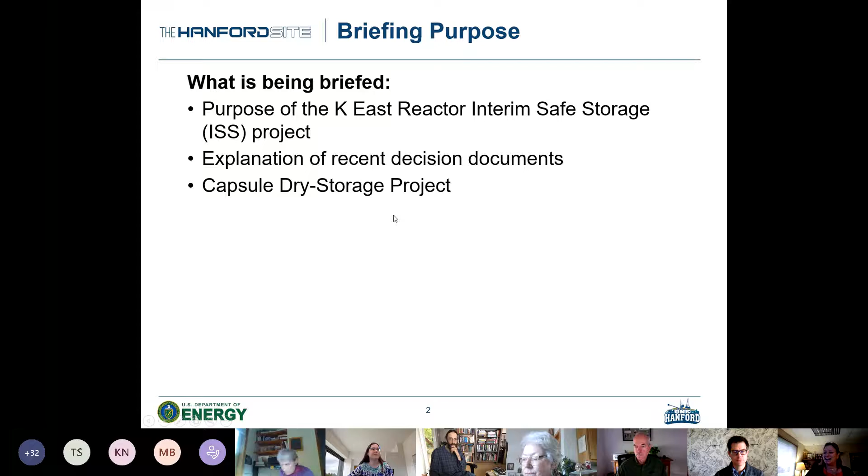All right, as Jolynn mentioned, my name is Kelly Ebert, and today I will be giving you an update on the K-East interim safe storage.

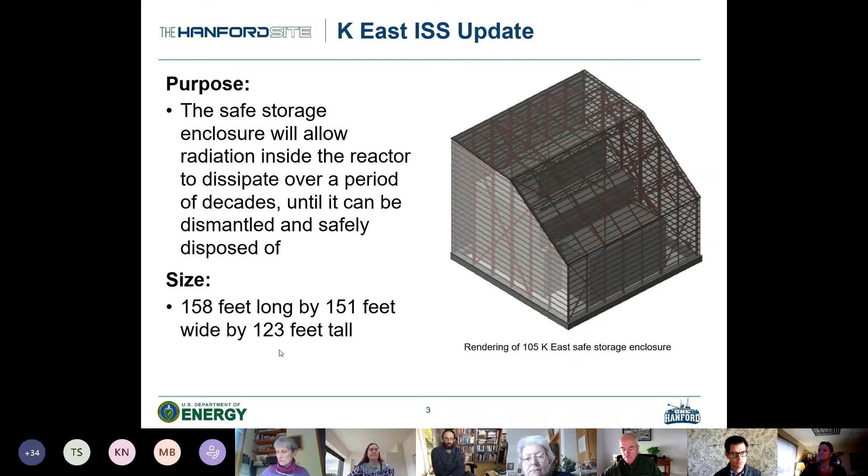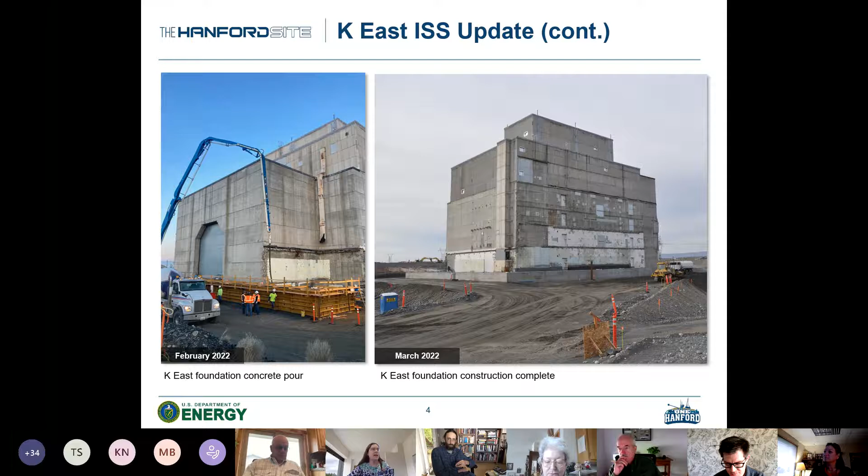Okay, so this video I want to show you was done by the contractor, and it outlines the concrete pour that was done. If you want to go ahead and click on that, and let's hope for no technical issues.

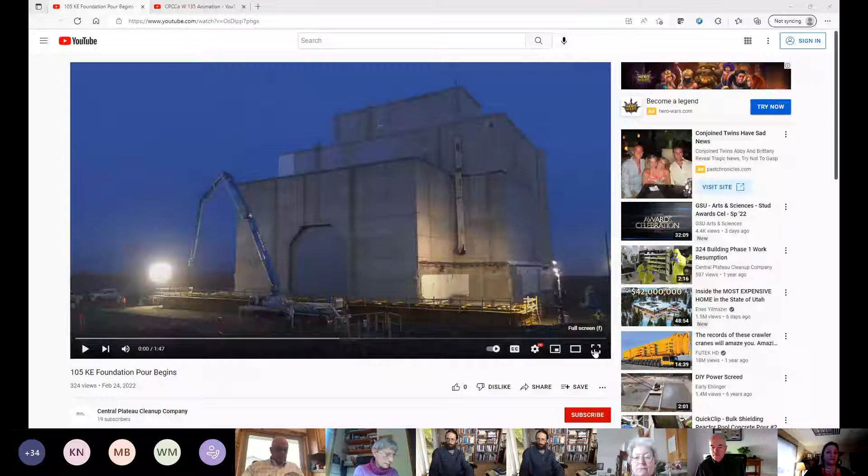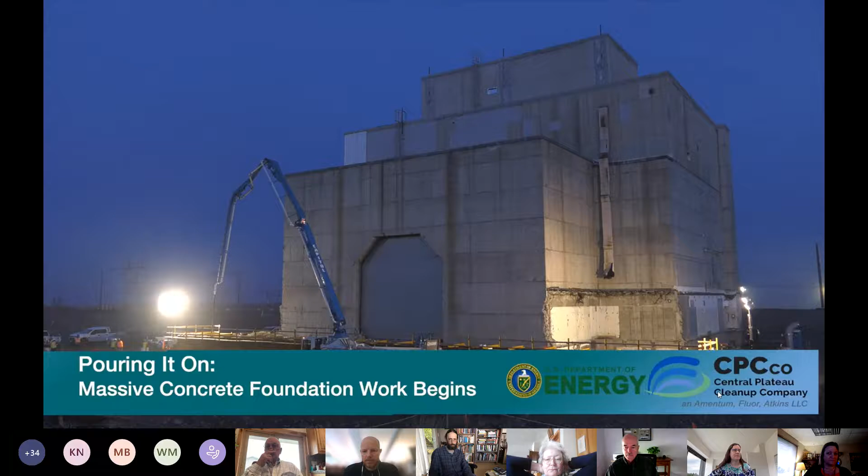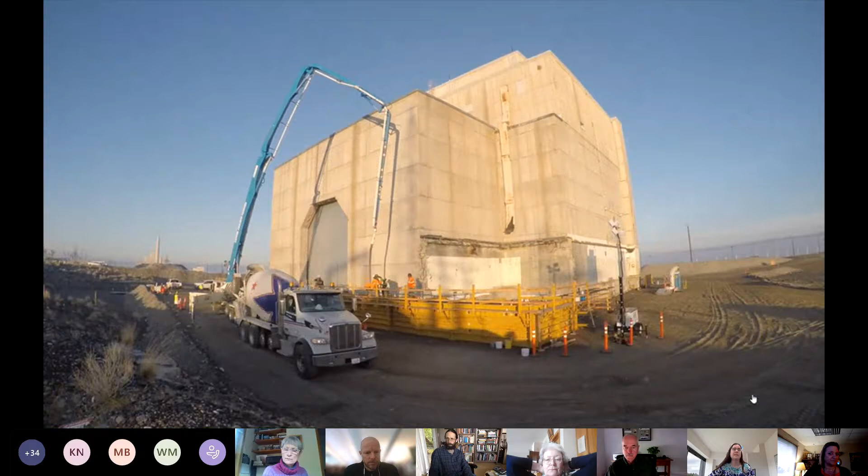Can everybody see the screen? Yes, we can. Wonderful. Oh, you know what I didn't do? It doesn't look like we have volume. I think there's commentary with the video. All right, let me try this one again. My apologies, everyone. Mark Reese did send these videos out to the board earlier, so most of us have had a chance to look at them.

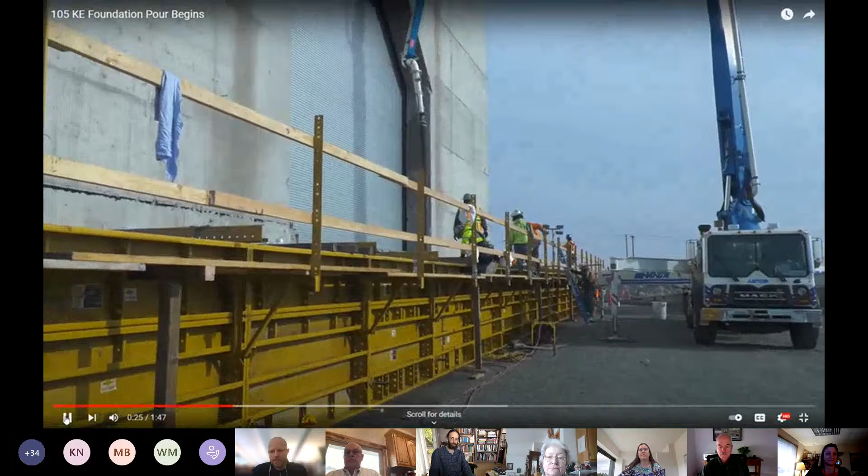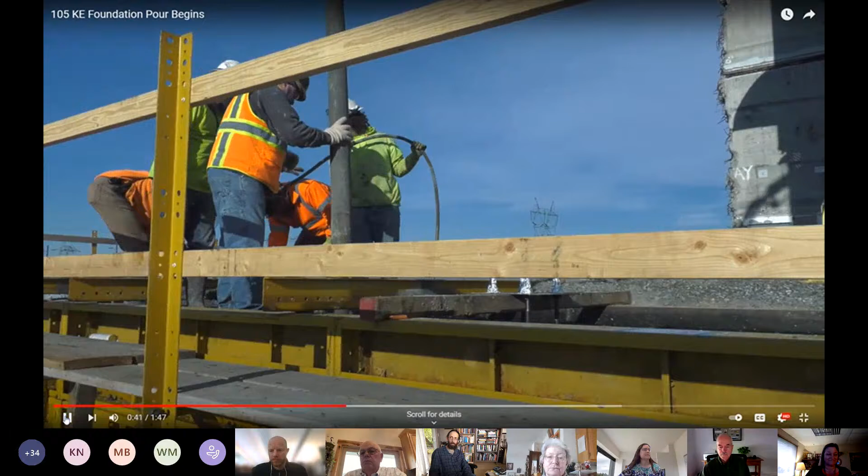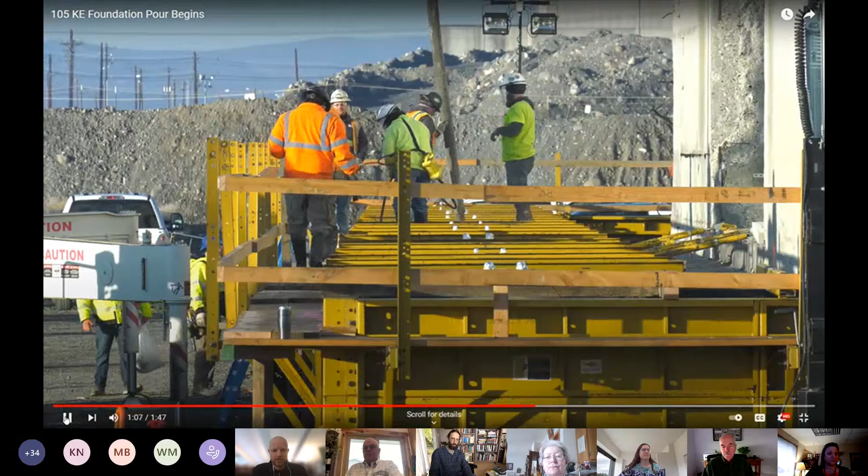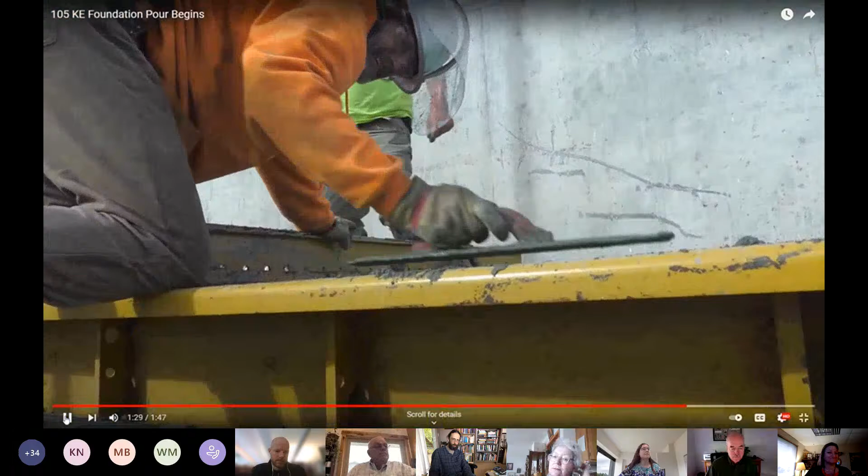The first piece of a very big puzzle is now in place. At sunrise, crews began pouring 24 loads of concrete, 240 yards total, to form the first section of the foundation surrounding the 105K East reactor. This huge chunk of concrete anchors the massive steel enclosure, sometimes called a cocoon, that workers will assemble to protect the building while the radioactivity in the reactor core decays over the next several decades. A lot of hard work, but the crew says it's worth it. This is one of the biggest construction jobs I've ever been on, and it's fun. I'm enjoying myself. It's just great. This is the first of 4 sections of the 6-foot tall, 6-foot thick foundation that will be poured. That's a big pour for the manpower and a grade beam. So there's a lot of planning to this - many days of looking at prints, going over prints. It takes the whole team to do this: the rebar crew, the engineers. Once our foundation is complete, we'll finish backfilling and start erecting the steel structure, probably mid-April timeframe, and it's going to be like a giant erector set. The K-East reactor operated from 1955 to 1971. It will be the 7th of Hanford's 9 former reactors to be placed in interim safe storage.

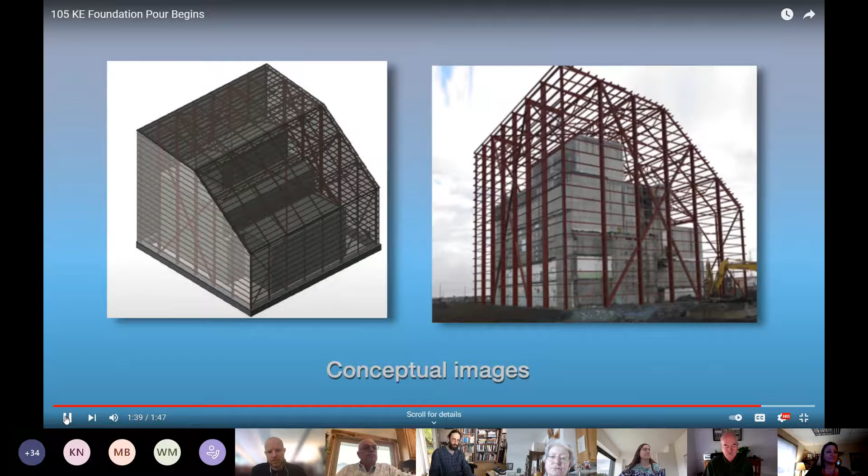All right, thank you, Jillian. So should we ask if there are any questions or comments on this video, or hold off to the end? You're welcome to ask. I know JoLynn is just bringing the presentation back up. I just had 1 or 2 more slides.

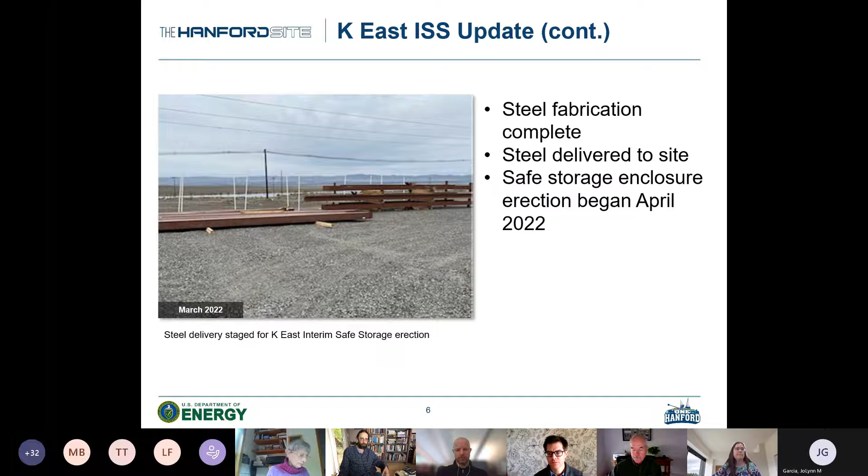All right, thank you. Good morning, everyone. My name is Naomi Jaschke. I work in the Soil and Groundwater Division here at Hanford.

So I hope you don't mind, it's been about 10 years since I presented to your board before, so I thought I would just introduce myself a little bit before I began. I'm originally from Ohio - go Buckeyes, Buckeyes fans out there. I moved here in 2007 to work for Department of Energy.

There are 5 pump and treat facilities along the river, and this larger pump and treat is in the center of the site, the Central Plateau. This facility treats 2,500 gallons per minute, and the combined treatment along the river in those 5 pump and treats is 2,400 gallons per minute.

So together, these facilities are treating over 2 billion gallons of groundwater every year. We've removed 500 tons of contaminants and treated more than 2.4 billion gallons of contaminated groundwater combined at the 6 pump and treat facilities last year in 2021. This year marked the 7th year in a row that we have treated over 2.2 billion gallons of water, and we have the goal of treating 2.2 billion gallons again this year. So we're making really great progress.

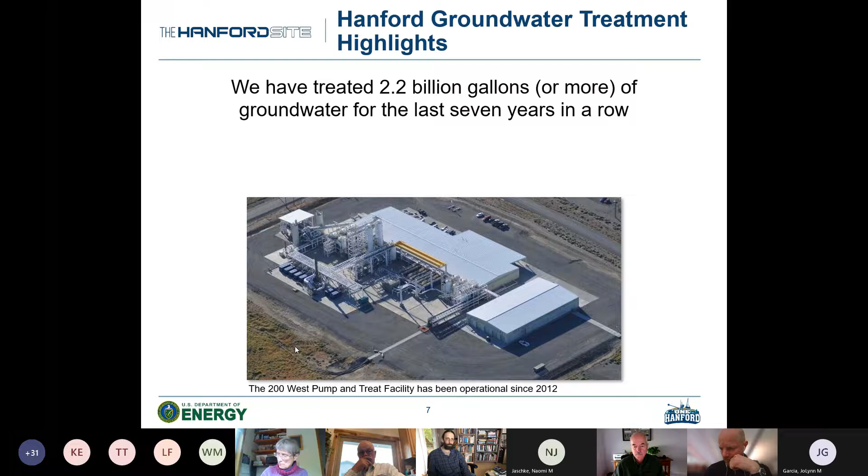And finally, in the center of the site, in the Central Plateau, this is the record of decision, which encompasses 2 operable units. We have 200 BP5, which is the green area to the north on the east area, and 200 PO1, which is the tan color to the south.

A little bit of background: decision documents are part of the CERCLA process. CERCLA remedial actions are documented in formal records of decisions, or what we call RODs.

A little bit of history on this. In 1989, the U.S. Environmental Protection Agency, EPA, placed 4 areas, the 100 area, the 200 area, the 300 area, and the 1100 area of the Hanford site on the national priorities list. In anticipation of that listing, EPA, DOE, and Ecology entered into the tri-party agreement. This agreement established procedural framework and schedules for developing, implementing, and monitoring CERCLA responses on the Hanford site.

If you're interested in more information, I can dive into that in a separate presentation, but I just wanted to go over quickly before I dive into the decision documents the basis of how we get to decision documents. So as I go through the decisions, I'll be talking about remedial design, remedial action, work plans.

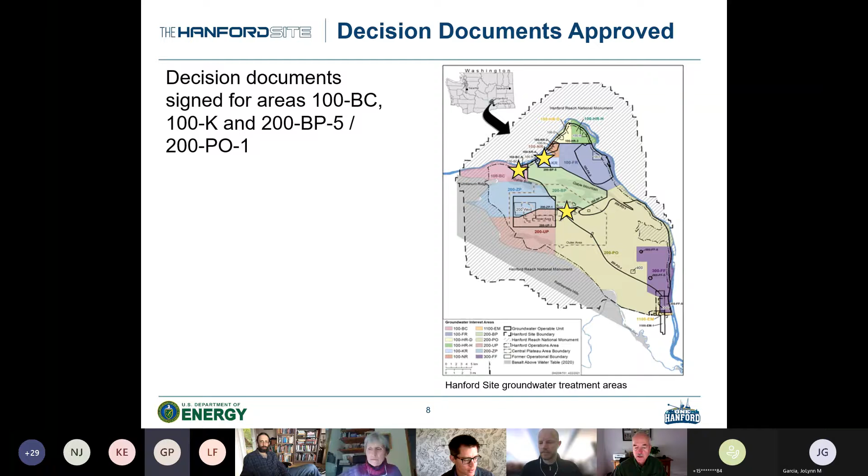Hello, this is Gary Pyles. Can you hear me? Yes, we can. Go ahead. I guess I'm next, so if you want to go to the next slide.

I'm going to start off with a 5-minute video that walks through a brief history of the capsules as we begin this project to remove them from the pool cell and put them into long-term dry storage. More importantly, it'll show the process for how we're going to do it, walking through the different areas within WESF we're going to use, and describing the transfer equipment and the vertical concrete casks where the capsules will be stored. I'm a visual person, so I like to start off with that, and it'll give you a better idea of the process before I talk about status.

Okay, go ahead and start whenever you're ready. Okay, thanks so much.

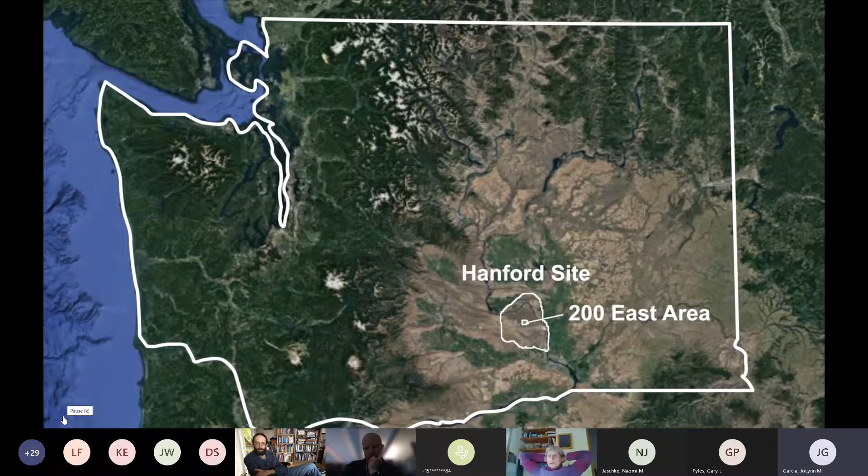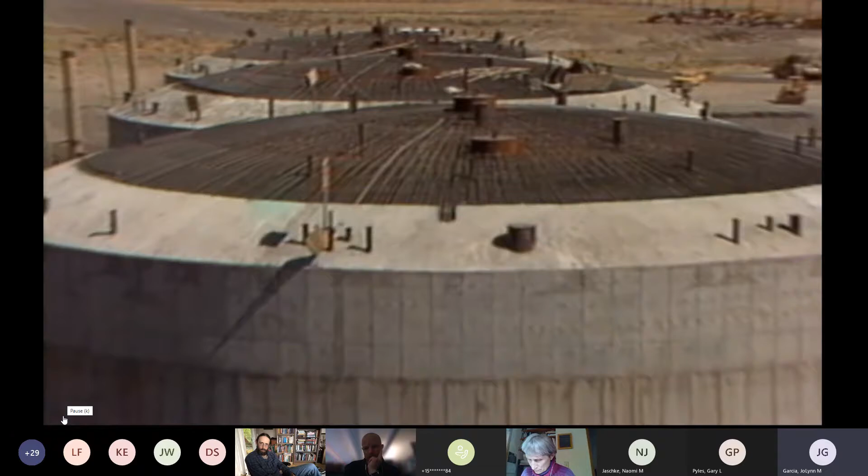The U.S. Department of Energy and contractor Central Plateau Cleanup Company are reducing risk in the 200 East area of the Hanford site in Washington state. Engineers have developed a safe and compliant process to remove 1,936 highly radioactive cesium and strontium capsules from underwater storage inside the Waste Encapsulation and Storage Facility, or WESF, to a safer dry storage configuration. In the 1970s, cesium and strontium were removed from waste tanks at Hanford to reduce the temperature of the waste inside the tanks. The capsules represent about a third of the total radioactivity on the Hanford site.

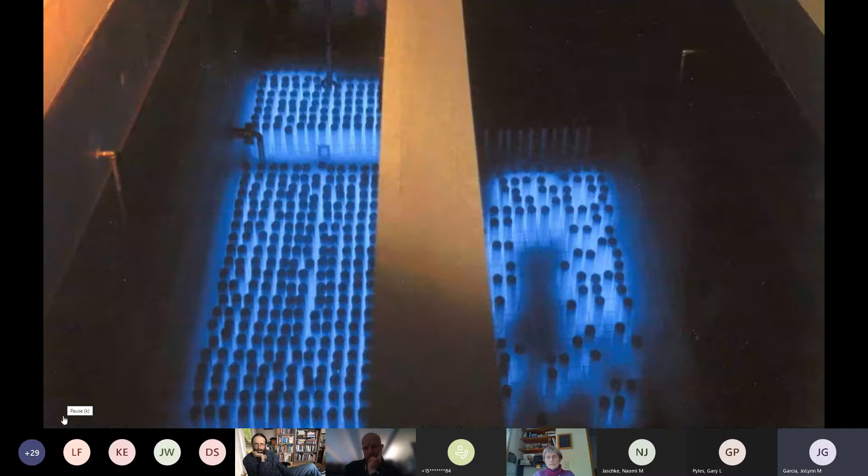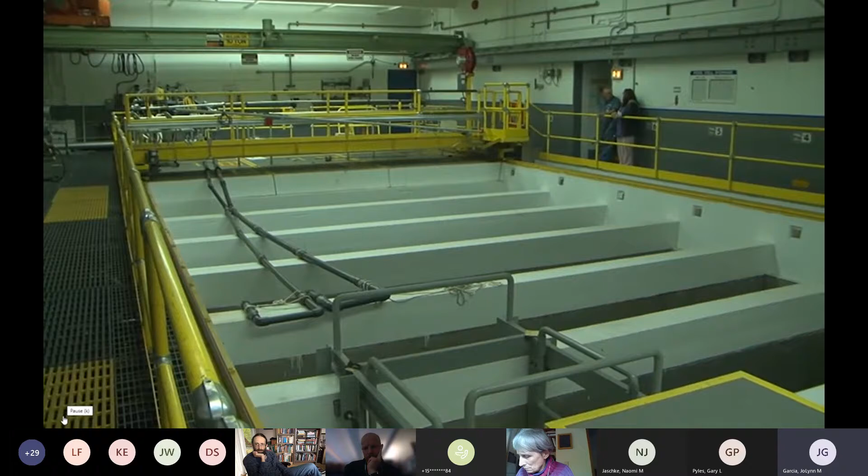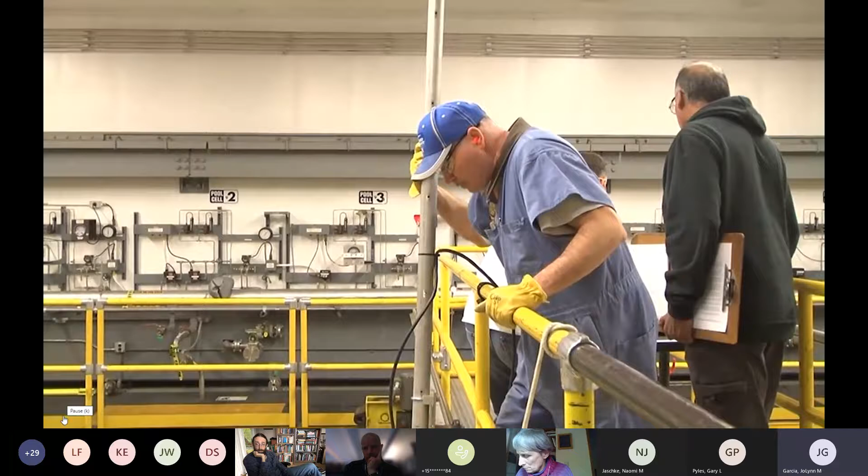While they are currently in a safe configuration, WESF is an aging facility. Transferring them to dry storage would eliminate the possibility of a release of radioactive material in the unlikely event of a major earthquake that might result in loss of pool storage water and subsequent overheating and breach of the capsules. Teams of well-trained personnel will accomplish this work safely and compliantly, benefiting from lessons learned and proficiencies gained from training with the equipment at a full-scale, non-radiological mock-up.

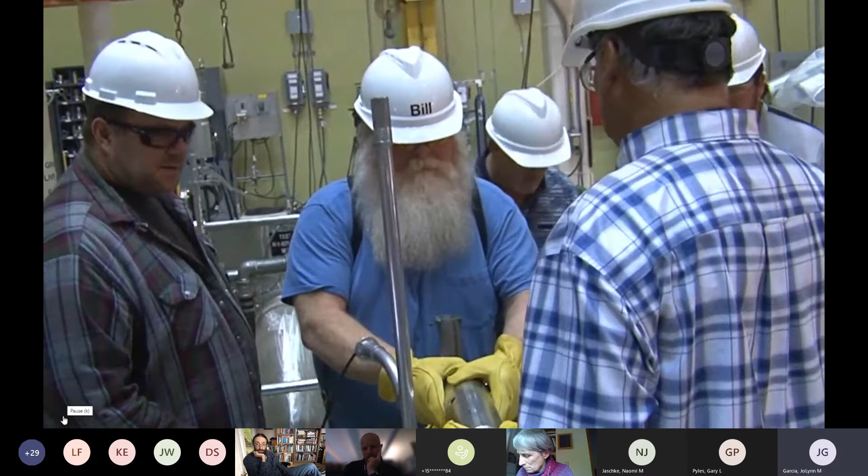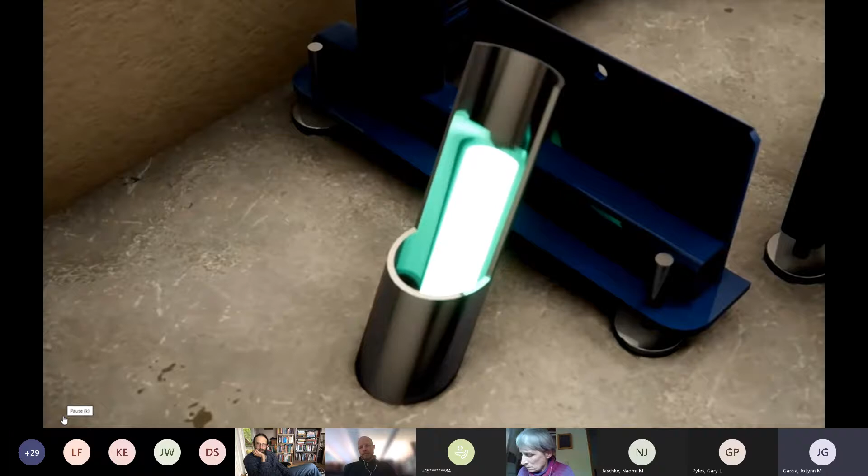To begin the removal process, workers on a catwalk will use long-reach pole tools to access the capsules, which are stored under 13 feet of water that provides adequate radiation shielding. Workers will retrieve the capsule and move it to the transfer chute connecting to the hot cell, or G cell. From outside G cell, workers will use manipulator arms to bring the capsule near a shielded window to inspect it for damage, and also verify the capsule's identity to ensure the correct capsules are loaded in a way that complies with the capsule storage thermal analysis.

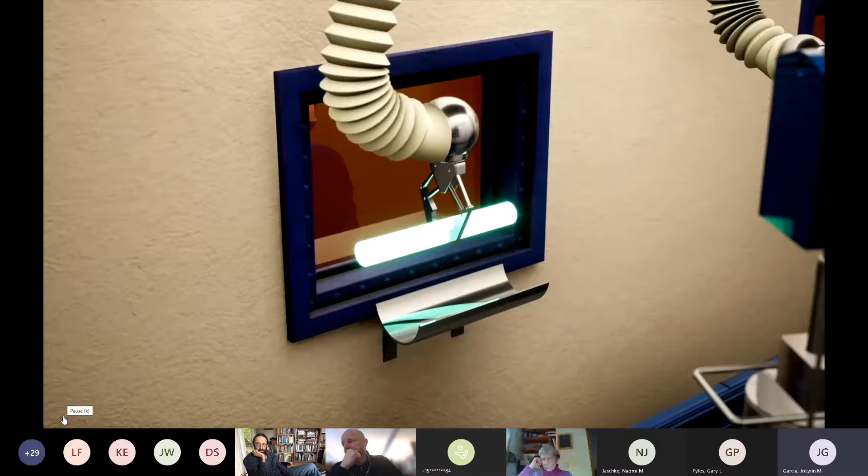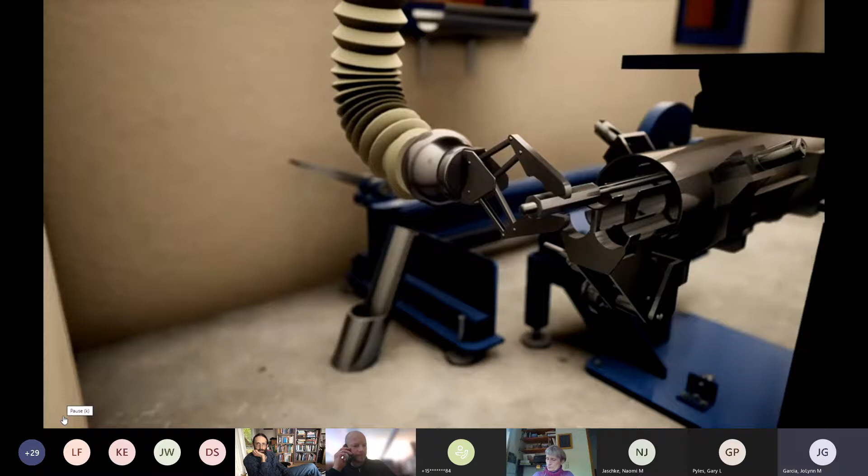If operators find a damaged capsule, they will place it in a larger overpack capsule. Then, workers using the manipulator arms and a special insertion tool will place the capsule into a universal capsule sleeve, or UCS, which can hold up to 6 capsules. Once the UCS is full, the air inside will be displaced with helium, which helps dissipate heat from the capsules. Following a successful leak test, the UCS is ready for transfer to the truck port.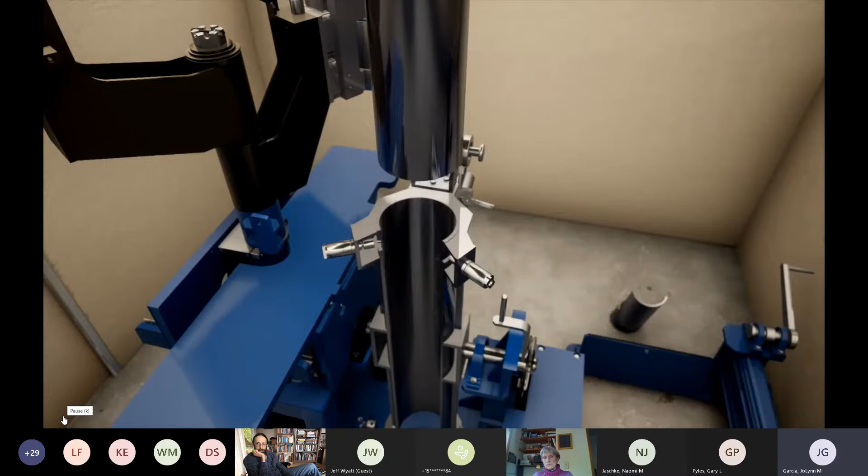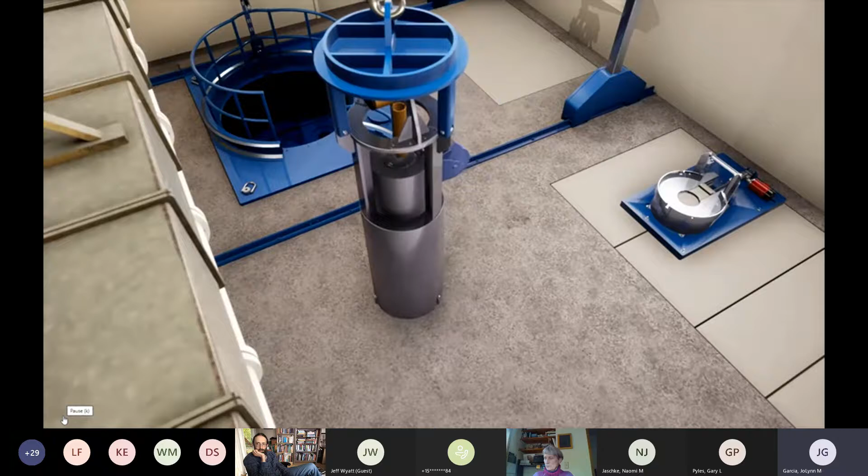Using cameras, workers will guide a grapple over the UCS, hoist it out of G cell and into the Shielded Dry Transfer System, or DTS. The DTS is a large shielded cask that will transfer the UCS from G cell into the WESF Canyon to the truck port, using a 15-ton crane.

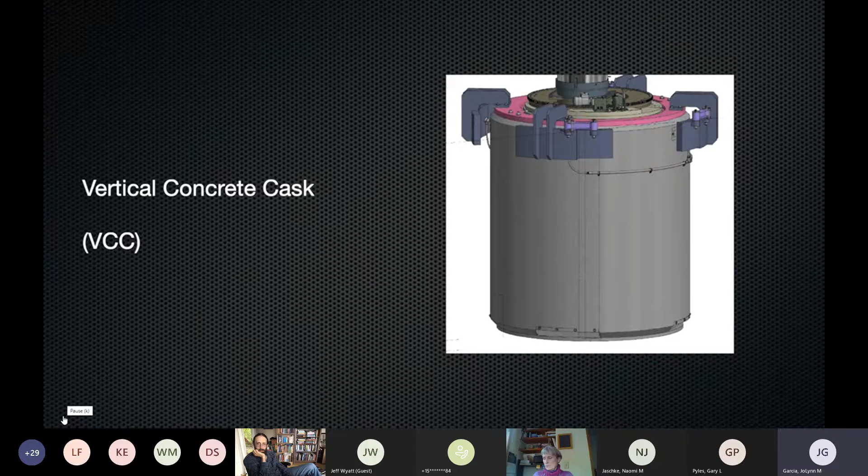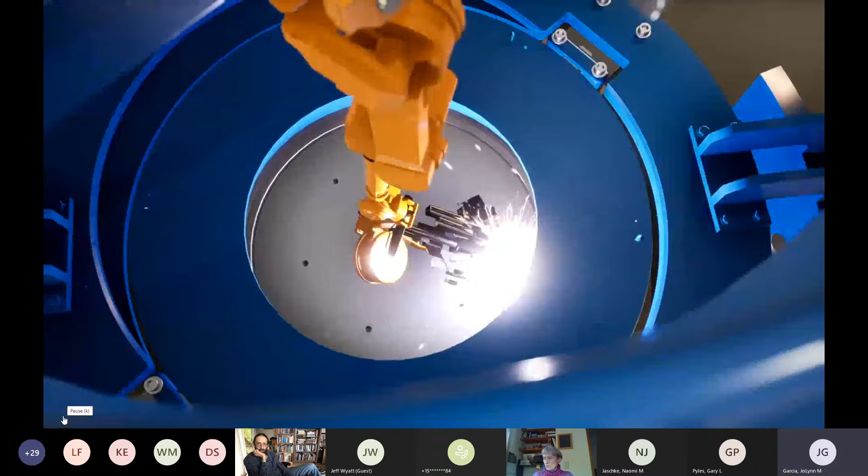In the truck port is an 11-foot tall, 10-foot diameter cask shielded with reinforced concrete. In the cask is a storage container capable of holding up to 22 universal capsule sleeves. A robotic welder will seal the lid of the inner storage container.

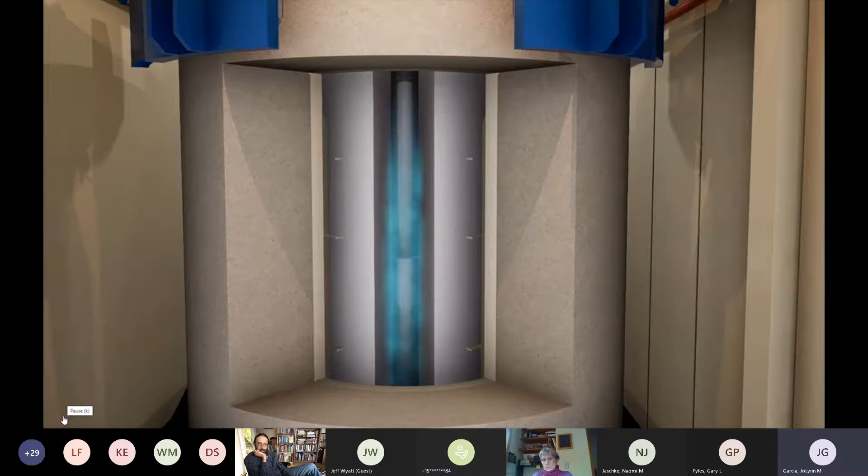The air will be removed, and then the container will be filled with helium to aid in keeping the capsules cool. Once the helium is in place, a second outer lid will be placed on the storage container and welded in place.

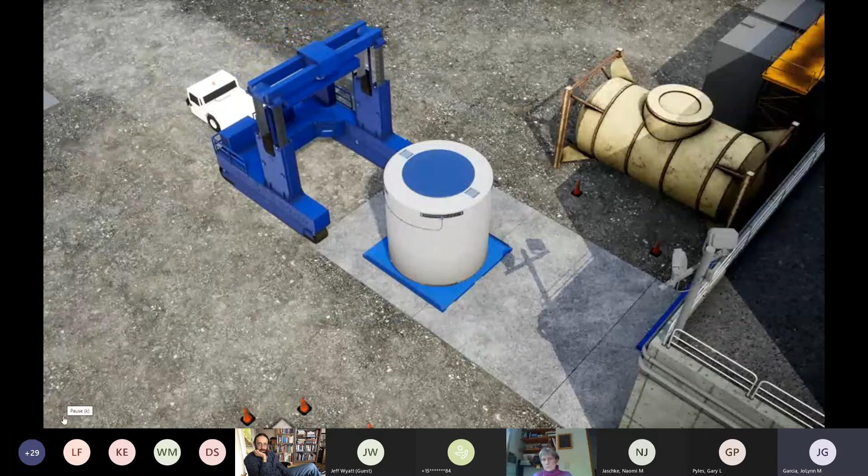Once the loading process is complete, workers will open the truck port roll-up door and remove the cask. The equipment used to transport the cask has been repurposed from a previous DOE project, avoiding millions of dollars of cost. The vertical cask transporter, or VCT, a specially designed hydraulic lift unit, is used to lift the cask.

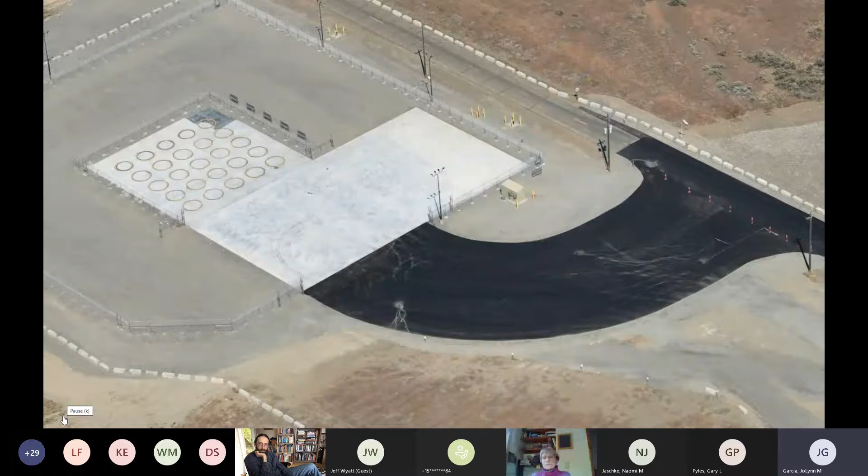The tug will tow the VCT and cask to the capsule storage area, a 90-foot by 90-foot secure outdoor storage pad located approximately 1/4 mile from WESF. The cask will be placed on the pad and will be connected to a temperature monitoring system. The cask will be placed in one of the 25 locations on the pad.

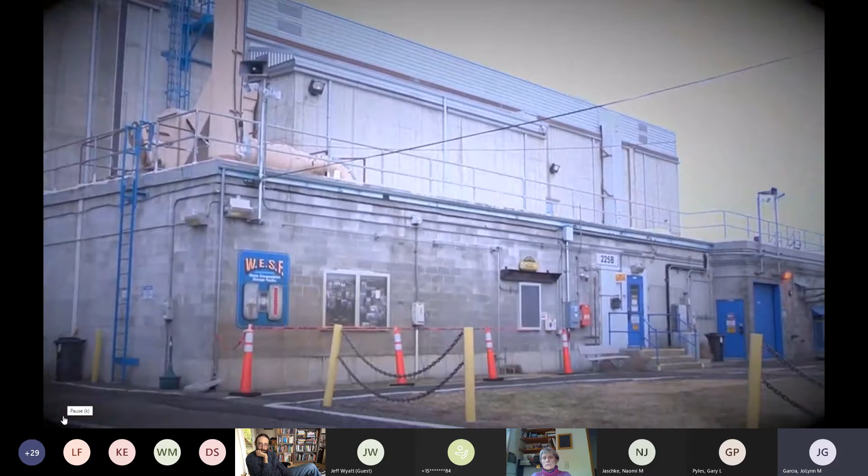Once the final capsule has been retrieved and the final cask has been placed onto the storage pad, WESF can be prepared for demolition. These cesium and strontium capsules will remain in a safe and passive condition until a permanent storage location is available.

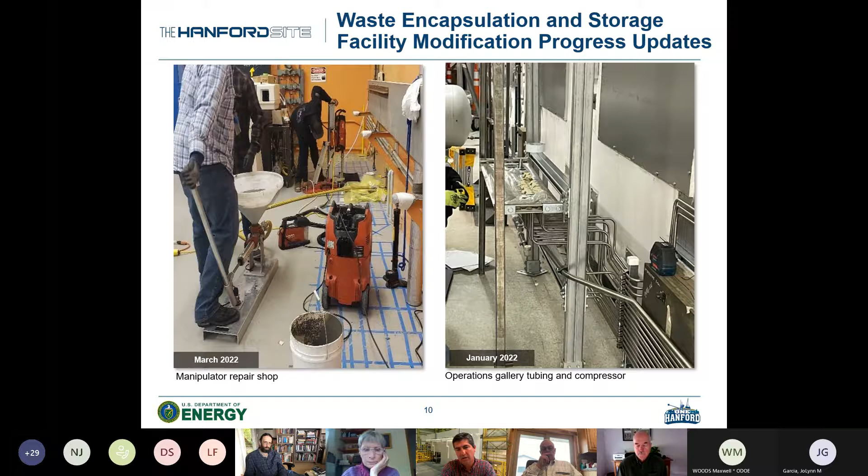Although there's no pictures inside the truck port, they've done quite a bit of work there. When they move the vertical concrete cask into the truck port using the air pallet, there's only about 2 inches of clearance on either side, so it's a very tight fit. Within the truck port there's a lot of piping along the walls and duct work, and all that had to be moved to make room for the cask to move in and out.

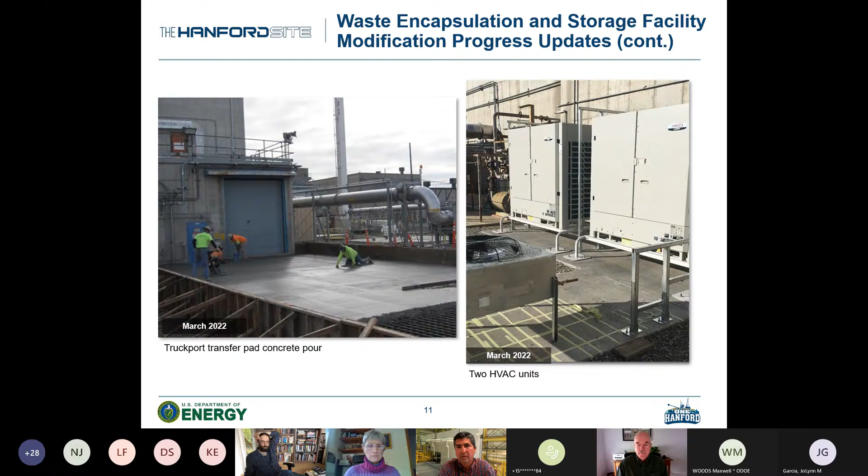Moving on to the next sub-project, the cask storage system itself. That's fabrication of the equipment that will be used to transfer the capsule, as well as the vertical concrete cask and all the components that go within that cask.

ABW, I believe in Aberdeen, Washington, I think they're building the universal capsule sleeves, the dry transfer system, and they'll be doing the cold spray on the transportable storage containers. The transportable storage containers, as well as the aluminum insert, are actually being fabricated by Hitachi Zosen in Japan.

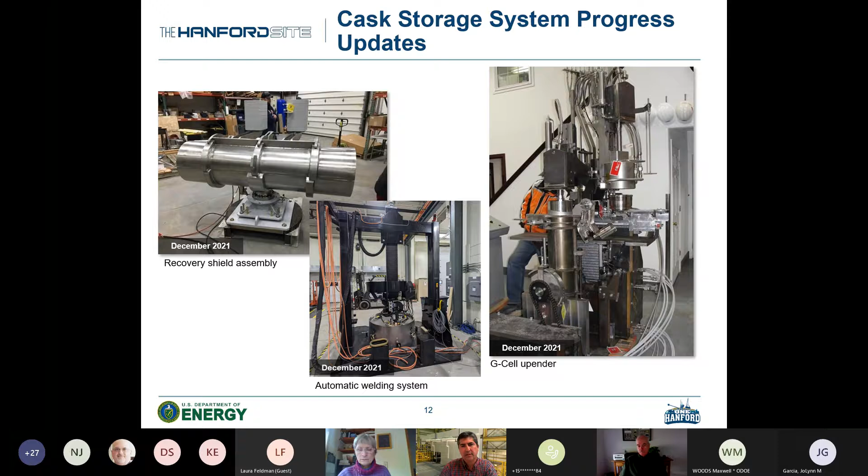This is a very critical, key point of the project, because this is where they'll build up procedures, do training, practice upset conditions, get ready for readiness activities, and really allow the operators to be proficient at moving capsules around before we actually start doing the work at WESF and working with these highly contaminated capsules.

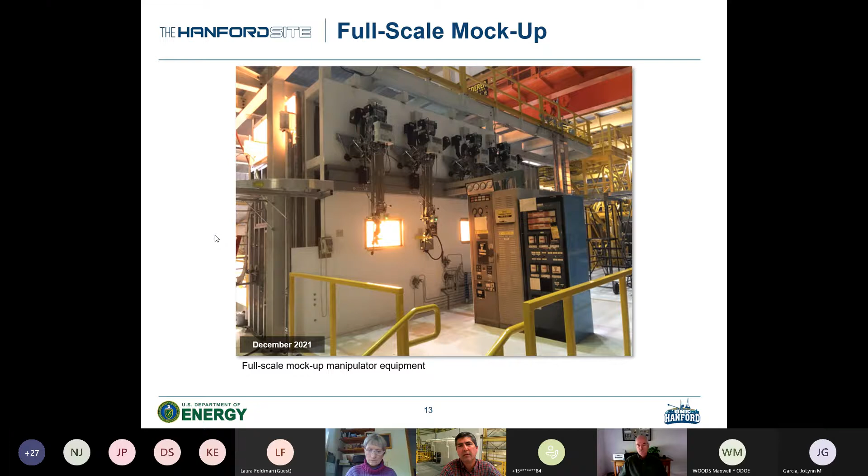And then finally, the dry storage area where the capsules will be placed into long-term storage. We actually started construction on this in February of 2020, and construction was pretty much complete at the end of last fiscal year. There was a list of punch list items that needed to be complete before we can turn the facility over to operations, and there's still one remaining punch list item that needs to be completed.

Back in August of 2021, they ordered connectors that will connect the temperature monitoring system to the vertical concrete cask. Because of supply chain issues, we've been having a hard time getting those connectors delivered, so we're still waiting for those. But once we get them, we'll install that and construction will be complete.

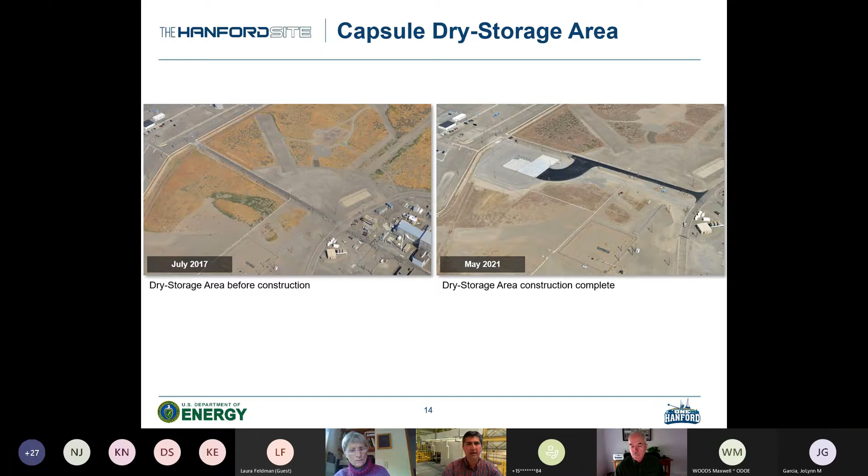Again, as mentioned, it's designed to hold 25 casks, but we only expect to use it to load 18. And then I think that's the end of it. So I guess with that, I'll open up to any other questions.